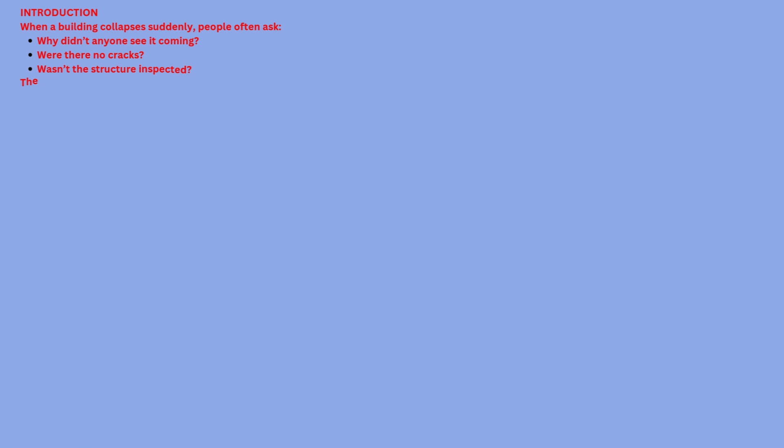Introduction. When a building collapses suddenly, people often ask, why didn't anyone see it coming? Were there no cracks? Wasn't the structure inspected? The truth is, not all failures announce themselves. Some failures grow silently, hidden within materials, connections, and assumptions.

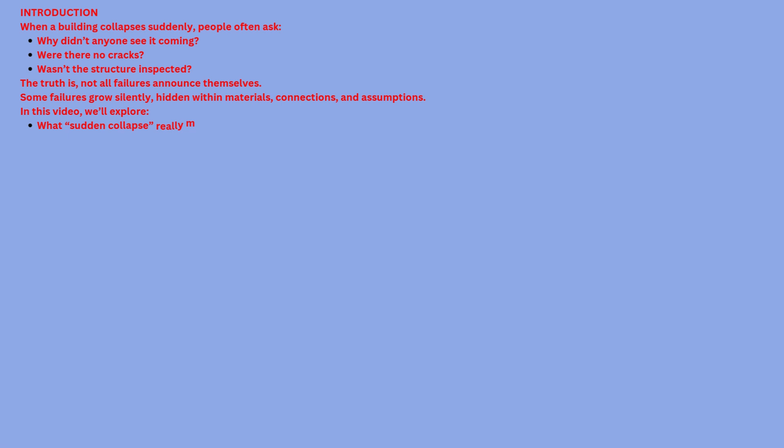In this video we'll explore what sudden collapse really means in engineering, hidden failure mechanisms, real-world examples of warning-free collapses, and how modern engineering works to prevent them.

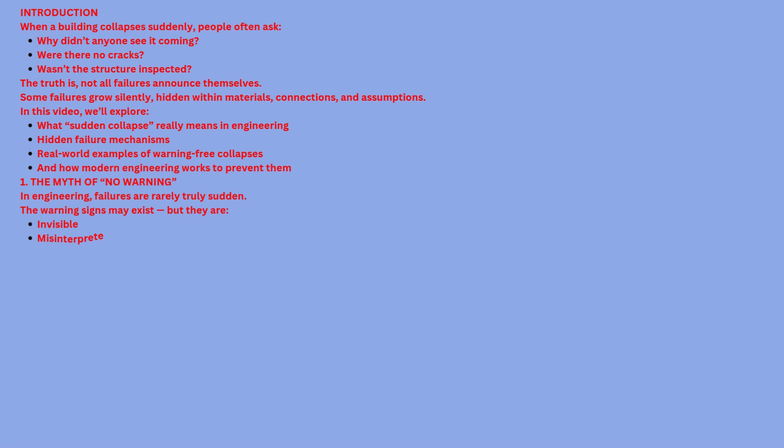1. The myth of no warning. In engineering, failures are rarely truly sudden. The warning signs may exist, but they are invisible, misinterpreted, or occurring internally. What appears to be a surprise is often a missed signal.

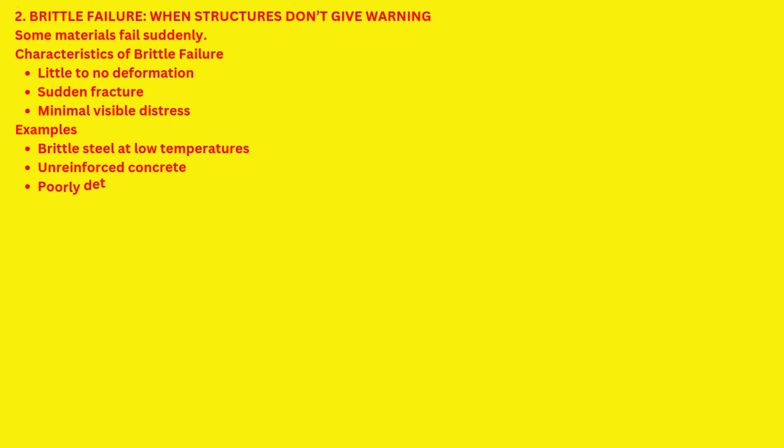2. Brittle failure. When structures don't give warning, some materials fail suddenly. Characteristics of brittle failure: little to no deformation, sudden fracture, minimal visible distress. Examples: brittle steel at low temperatures, unreinforced concrete, poorly detailed connections. When brittle failure occurs, collapse can be instantaneous.

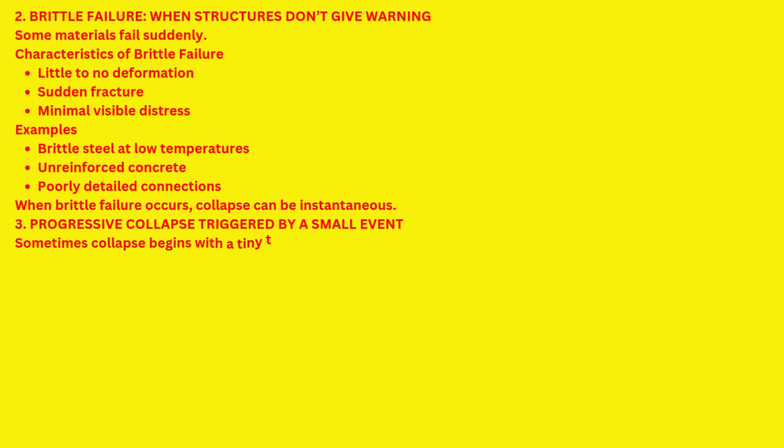3. Progressive collapse triggered by a small event. Sometimes collapse begins with a tiny trigger. Possible triggers: gas explosion, vehicle impact, column removal, localized fire. If a building lacks redundancy, that small trigger can cause total collapse.

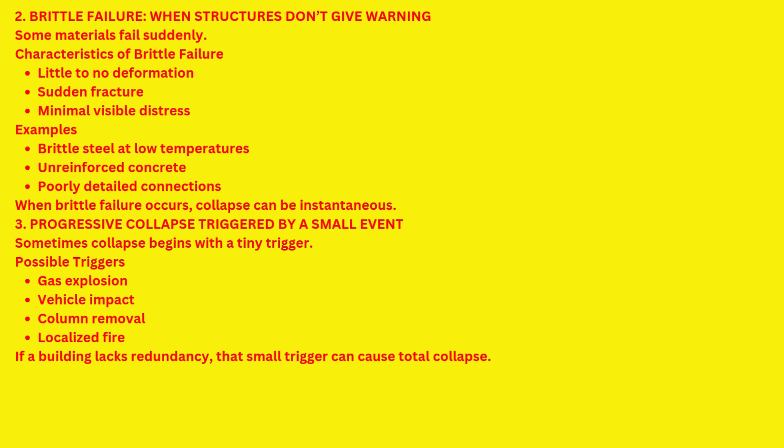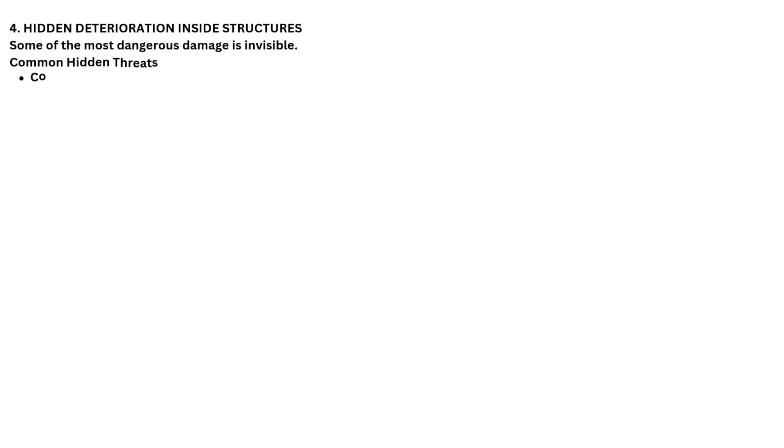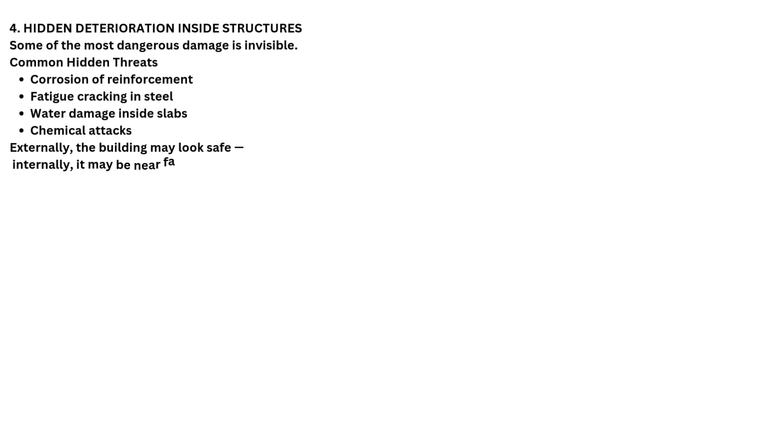4. Hidden deterioration inside structures. Some of the most dangerous damage is invisible. Common hidden threats: corrosion of reinforcement, fatigue cracking in steel, water damage inside slabs, chemical attacks. Externally, the building may look safe. Internally, it may be near failure.

5. Foundation and soil failures. Collapse can start below ground. Silent ground problems: soil liquefaction, sinkhole formation, differential settlement, erosion under foundations. These failures give little surface warning until collapse occurs.

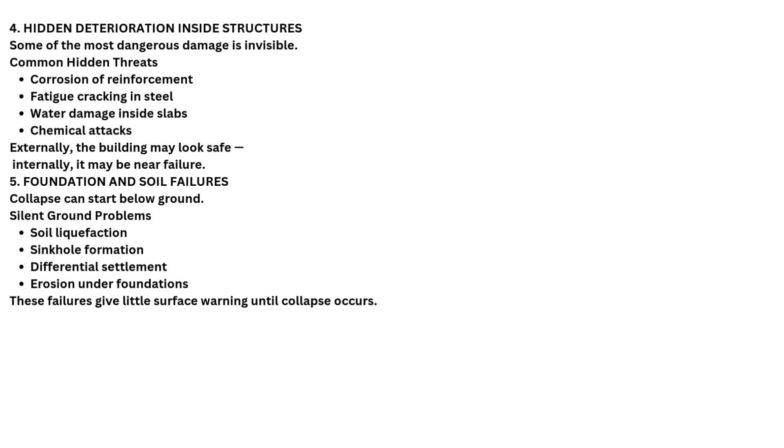8. Real-world examples of warning-free collapse. Champlain Towers South: internal corrosion and deterioration caused sudden collapse. Ronan Point: a small explosion triggered progressive failure. Parking garage failures: hidden corrosion and overloading led to sudden collapse. These disasters shocked the world, not because there were no warnings, but because the warnings were hidden or ignored.

9. How modern engineering reduces sudden collapse. Redundancy and robustness: buildings are designed with multiple load paths. Structural health monitoring: sensors detect internal changes long before visible damage appears. Improved inspection practices: regular, detailed inspections catch early-stage deterioration. Performance-based design: designing for how structures behave, not just code limits.

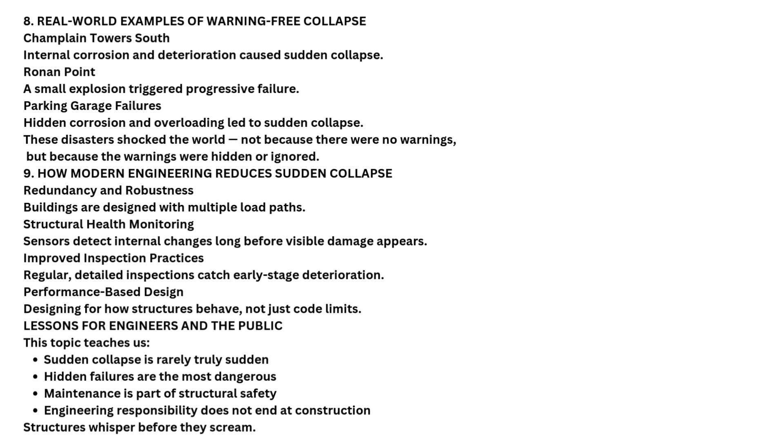Lessons for engineers and the public. This topic teaches us: sudden collapse is rarely truly sudden. Hidden failures are the most dangerous. Maintenance is part of structural safety. Engineering responsibility does not end at construction. Structures whisper before they scream.

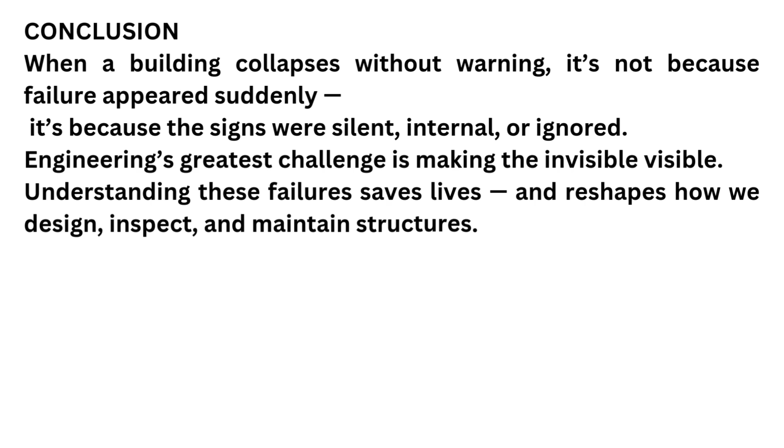Conclusion. When a building collapses without warning, it's not because failure appeared suddenly. It's because the signs were silent, internal, or ignored. Engineering's greatest challenge is making the invisible visible. Understanding these failures saves lives and reshapes how we design, inspect, and maintain structures.